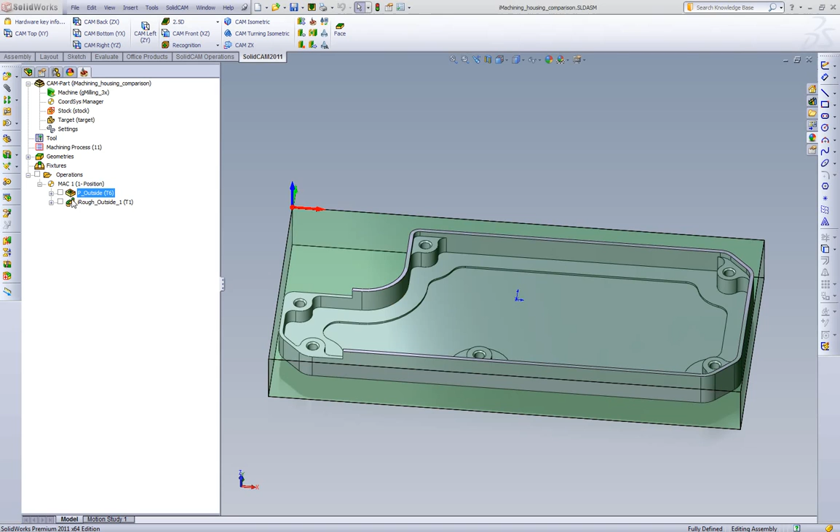In this video, we want to do a true and fair comparison of standard offset style strategies and the iMachining toolpath. And then we'll also compare the iMachining wizard and its feeds and speeds. What we have set up is we have a standard pocketing toolpath cutting the outside of our part. This is a standard parallel offset, as we can see, in one-way cutting. The second operation we have set up is an iMachining toolpath for that same geometry.

So let's go to the pocketing toolpath and let's pick some real-world feeds and speeds. What we have here is a 1/2" end mill, 4-flute. So let's say we'll start out with just a high-speed steel 4-flute roughing end mill, cutting steel. If we were to pick some real-world feeds and speeds, assuming we're not doing high-speed machining, if we were cutting steel, we'd probably run something around 100 surface feet and pick something around 4 thou chip load. This ends up working out to roughly 760 RPM and a little less than 12.5 inches a minute.

If we were using a roughing end mill, chances are we'd be able to do this cut in one depth of cut. It's 900 thousandths, and we'd most likely get away with it. So we'll compare the cycle times for this feed and speed at one depth of cut, and then we'll also cut the depth of cut in half, do it in 2 passes, and see what the difference is. We are using a 60% step over on this part. So if we save and calculate and go to our simulation, we can see our feed rates and our running time, and we'll just quickly play this toolpath. We end up with 13 minutes and 30 seconds, roughly 13.5 minutes.

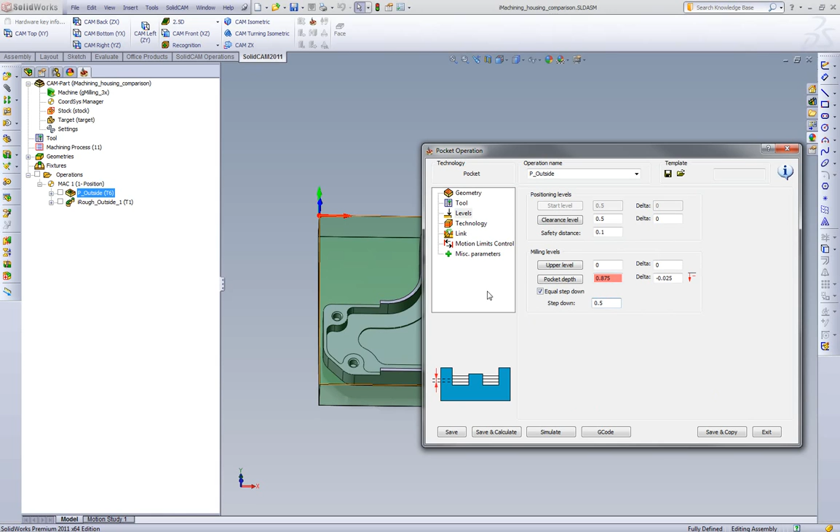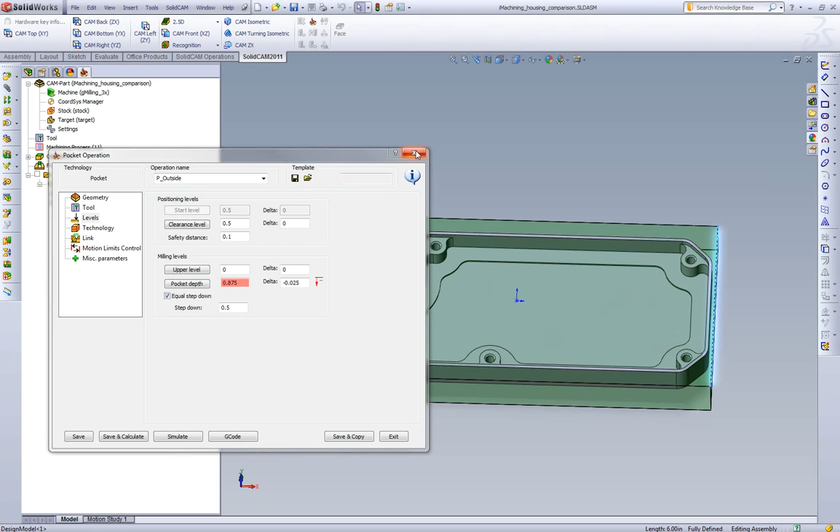If we were to change this cut and use, let's say, equal step down and a half, which will give us 2, and play this, we end up with almost 25 minutes worth of cycle time to machine this outside steel part. To give you an idea of the size of the part, it is roughly 12.5 inches by 6 inches long. Now let's take a look at if we use those exact same feeds and speeds, the 763 RPM and the 12.5 inches a minute, with an iMachining toolpath, what are we going to get?

Now most high-speed machining toolpaths on the market today will tell you that their strategies need to be using high-speed feeds and speeds to be more beneficial than the standard style strategies. In iMachining, we don't believe that. So we're going to disable the wizard entirely and run our own feeds and speeds: an RPM of 763 and a feed rate of 12.5 inches. Going to go to our technology. We're going to do one depth of cut. Since we're using a roughing end mill, we're going to maximize the step over, which at 80 degrees is 200 thousandths roughly. And since we're trying to mimic what we get in parallel strategies, we're going to pick a bigger minimum cutting angle.

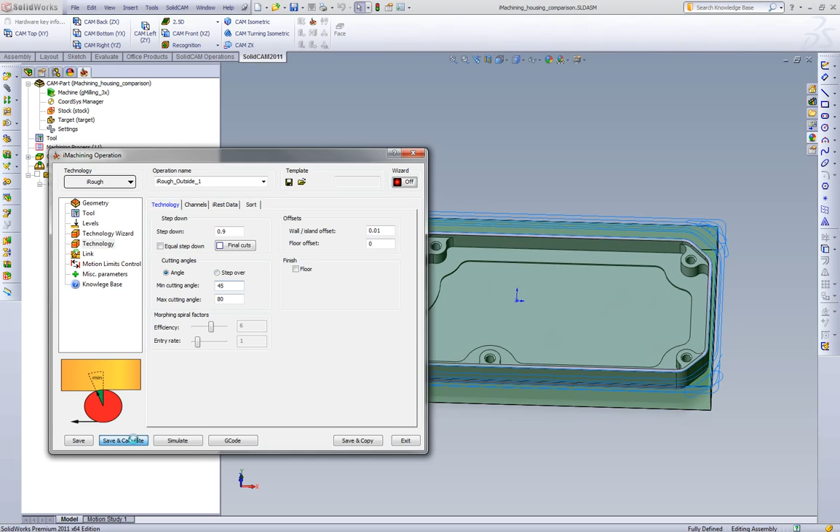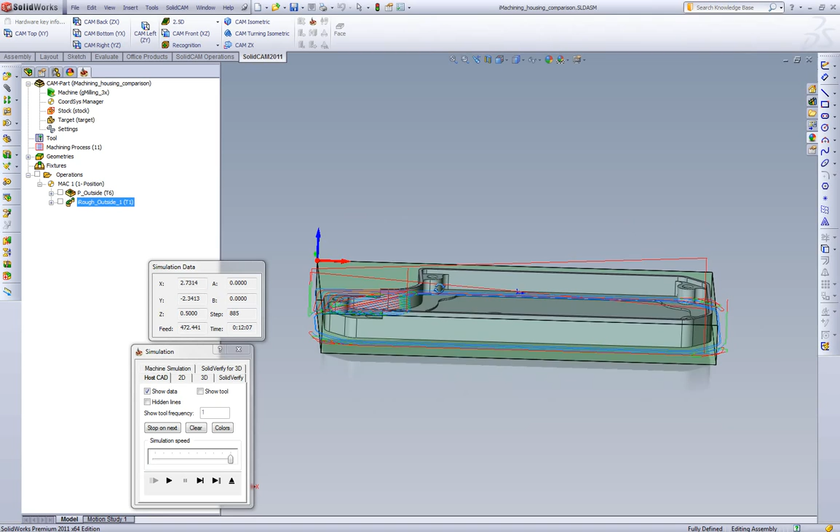We'll calculate this toolpath, run to our simulation, and see what we get. The iMachining toolpath is 12 minutes and 7 seconds, roughly 1.5 minutes quicker than even the standard pocketing or offset strategy with the same step over, feed, and speed. Now, how does iMachining do this? It does this by a couple things. First, as we look at the toolpath, there's very little clearance and retract movements. Because iMachining is doing smart repositioning and always staying in the cut, we're not wasting any feed Z moves or clearance moves. So you're getting a very big optimization just by keeping the tool down inside the cut the entire time.

The second thing is, we know we're not always going to achieve the step over that we ask from the toolpath. When that happens, we're automatically adjusting the feed rates to handle that. So if we start single stepping this, we can see in the beginning as it's entering the cut, we have less step over, so our feed rate's actually a little bit higher, and it gets up to 17. As we hit the full depth of cut, we're right at our roughly 12.5 inches per minute. So iMachining is being intelligent.

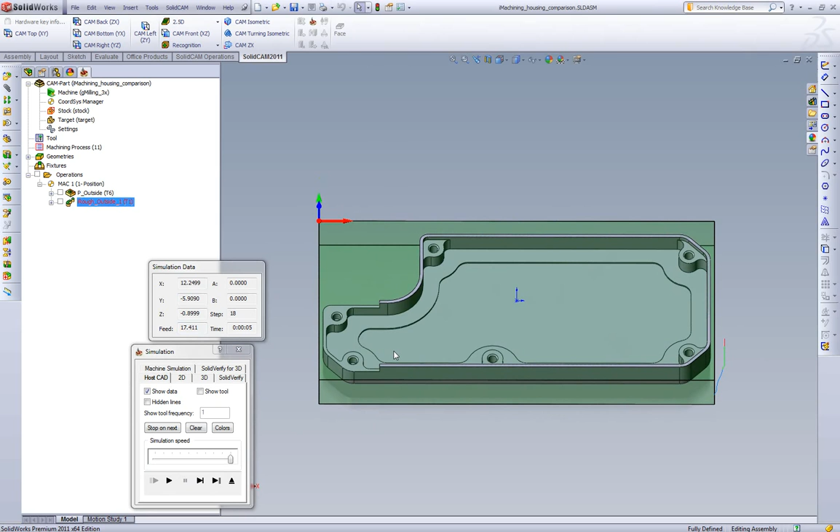It's getting rid of the repositions. It's staying in the cut the entire time. And it's adjusting the feed rate when the step over or the width of cut is falling below what we specify. So very efficient feeds and speeds, and you get a very nice toolpath. This is also going to be better for the tool in the long term because the tool's also staying in the cut more. It's not entering and exiting as much as it would with standard pocketing or standard offset cutting.

So this is a comparison of 13 minutes, 13 and a half, to 12 minutes. Not a huge difference, but even using the same feeds and speeds that any shop is used to, we're going to see a benefit with iMachining.

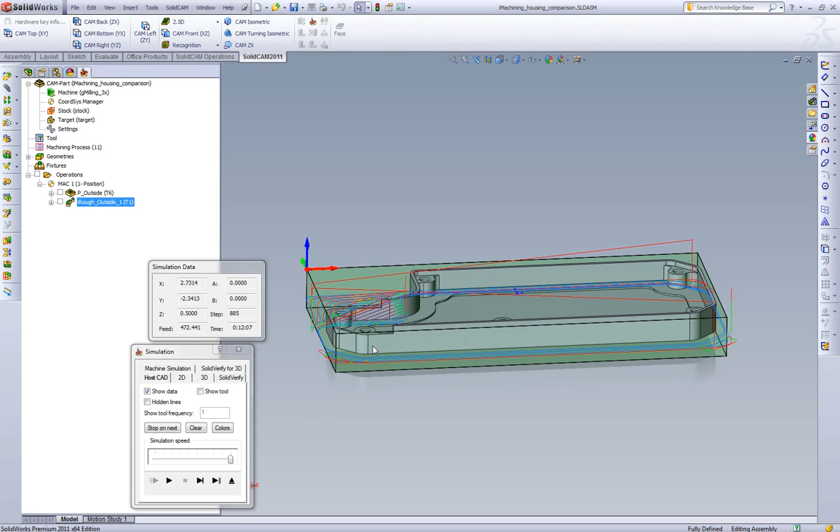And not to mention, when the tool path is running out on the machine, as an operator, you're going to feel much more comfortable not having all of those Z clearance retracts and plunging all the time with your hand on the cycle start button when you're running the first piece. So iMachining also gives you a better feel at the machine because the tool path is staying down and it's cutting more intelligently.

Now let's also take a comparison of what happens if we were to try and do, let's say, high-speed machining with a carbide end mill. Our customers are using high-speed or using carbide end mills today. So let's say we went back to this pocketing end mill. We're still going to use a 1/2 inch. We're going to still pretend it's a 4-flute carbide end mill. Now we're going to switch things up a little bit.

Now most likely if we're running carbide end mills in steel, we're going to run more surface footage, and we're also going to run shallower depth of cuts because we're not going to take the full 900 thou at that step over. So let's say we want to run something like 2500 RPM. A 1/2 inch end mill at 2500 RPM works out to 330 surface feet, which is a little on the high side for steel, but for people doing high-speed machining in steel, really not that high. Definitely doable. And then if we look at our feed rate, we get roughly 40 inches a minute. So 2500 RPM, 40 inches a minute.

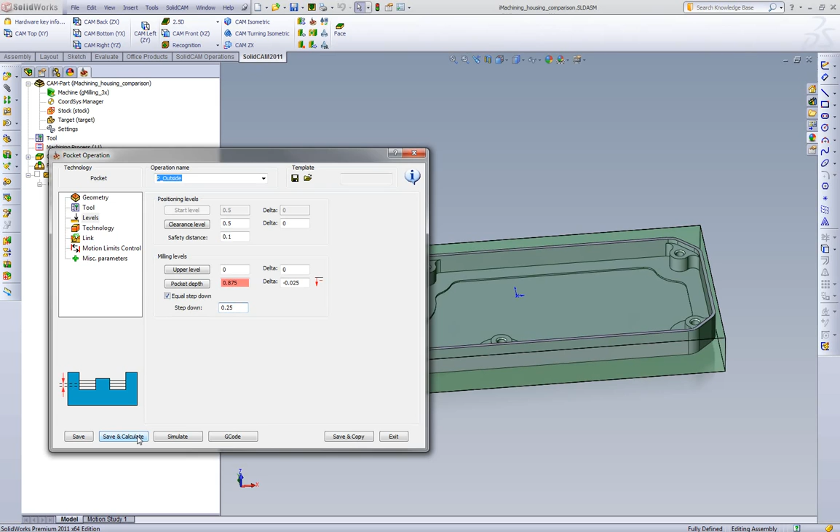We'll go to our levels, and we'll pick a 1/4 inch depth of cut. I personally feel that's a little heavy with a 4-flute 1/2 inch carbide end mill, but it really depends on your machine, the rigidity, the holder. So a 1/4 inch depth of cut is not unreasonable. Maybe it's a little high for some machines, and other machines might even be able to go a little bit deeper for sure. So let's calculate this tool path, and we'll see what cycle time we get.

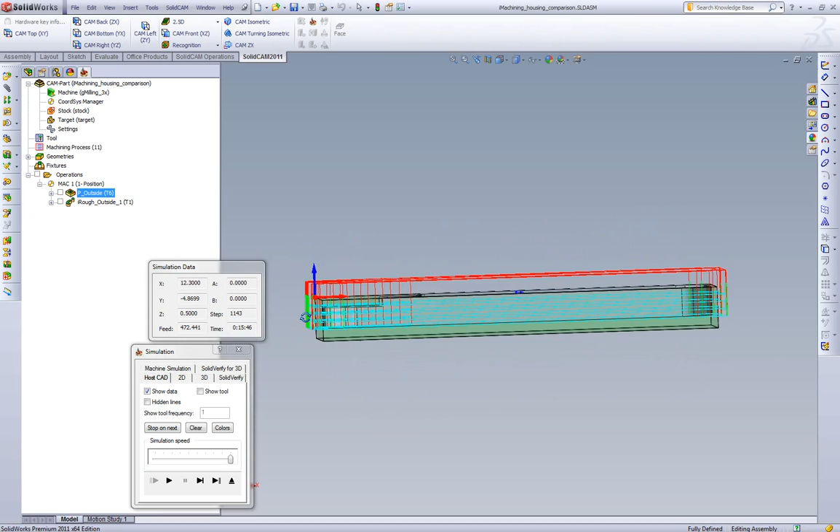So if we see here, we're sitting at 15 and a half minutes, almost 16 minutes. So this is a cycle time at a 1/4 inch depth of cut at 2500 RPM and 40 inches a minute. We can see basically the same tool path we had the first time. Now we're just going with a little bit shallower depth of cut, more RPM, higher feed rate.

Now let's go to the iMachining tool path, and we'll do the same thing. So we'll go to tool. We were running 2500 RPM. We're running 40 inches a minute. We'll also mimic the same step down, so we'll pick a 1/4 inch, equal step down, and we'll calculate the tool path.

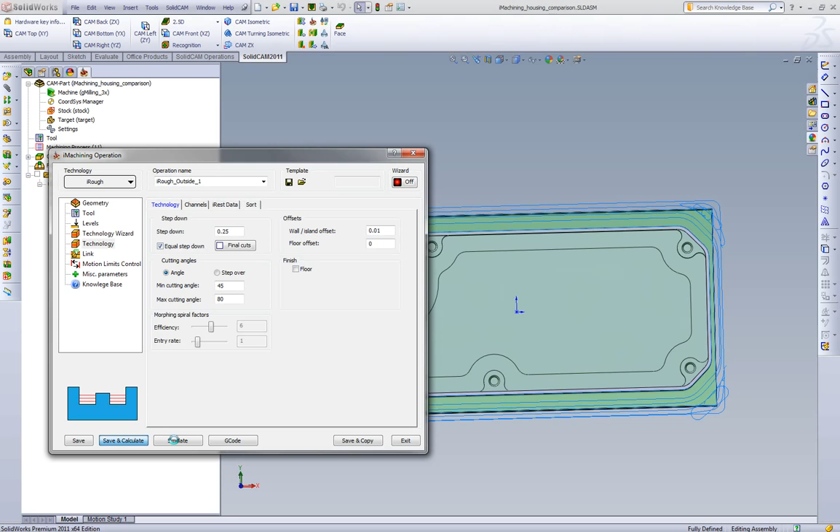15 minutes and 53 seconds. So basically you got the exact same cycle time going between standard pocketing with high-speed machining and iMachining. Yet we're keeping the tool in the material the entire time. You're getting less wear from the tool entering and exiting, and it's also doing smart repositioning.

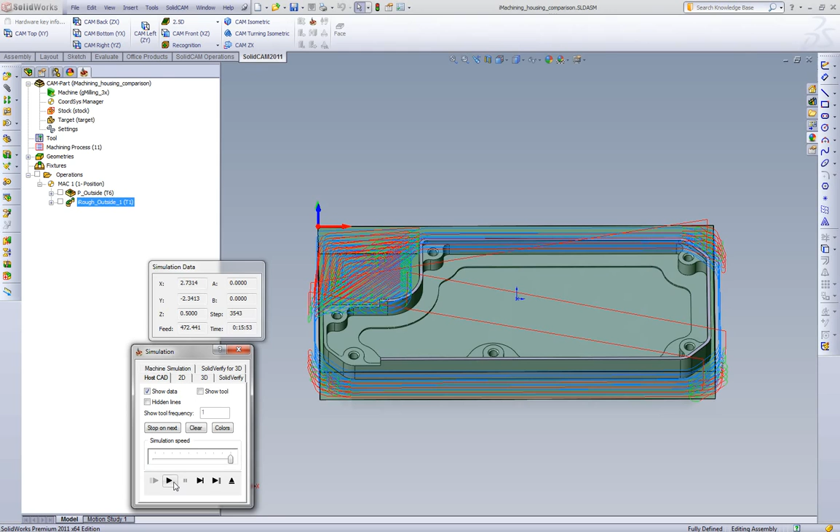Now let's do some comparisons on what iMachining's wizard would tell us to run. Because now that we're actually doing a step over control toolpath, we can take this thing in one depth of cut. Not a problem at all. So we're going to turn the wizard on and take a look at what the wizard generates. So first, let's not go all the way up to level 8. Let's say we're trying to be a little conservative, and let's step down to level 3. Now, when we step down to level 3, a couple things we're going to notice here. iMachining, unlike what we were doing with standard pocketing, is going to do a smaller radial width of cut.

This is because now we're doing full depth of cut, so we want to shorten up the width of cut, so that way we're not getting into a heat condition. When we're also doing this, we're going to adjust the feed rate for chip thinning, so we're running a constant chip thickness. Now, if we look, iMachining does some different things than what we do in standard pocketing.

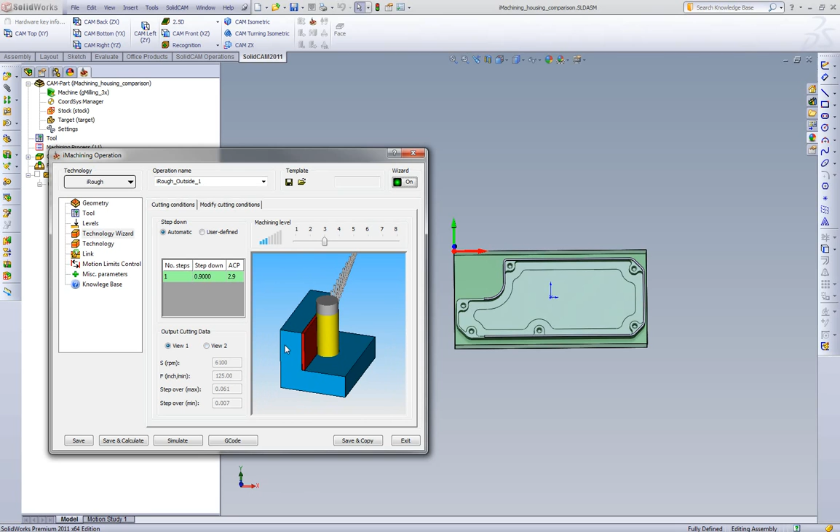When we're using carbide end mills, we're going to try and hold 2 thou and 9/10 of a chip thickness. So what this means is at the 61 thou step over, the 125 inches is going to meet that 2 9/10 chip load. Now iMachining is going to run up to 6100 RPM. This is going to be no problem with iMachining at all.

The biggest reason, as we know with standard offset style strategies: when does the tool make the most heat? When it goes into the corners. We've all seen as the tool path runs into the corner, you can see it smoke up. We've all basically had the coolant just dripping on it, and we know as it's cutting around the outside, it's nice and fine. As soon as it goes into a corner, the tool starts to smoke and the coolant evaporates, because the heat generated in the corner is what's dictating the entire tool path for us.

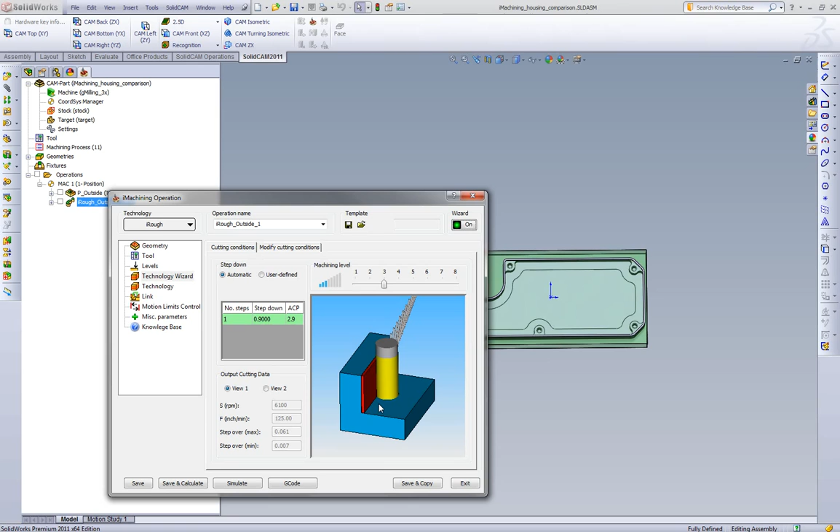Even though we knew if we were running in a straight line, we could run 6,000 RPM in steel, that wouldn't be an issue. Not at this step over, not at that depth of cut. But the issue is, in standard pocketing and standard offset style strategies, we're getting too big a step over in the corner, chip thickness is going through the roof, and we're slowing down the entire tool path because of it. So if we looked at what iMachining would do for this strategy at this step over, we'll see what time we get.

Now what we're going to see is, one, you're going to see a lot smaller step over, but we can see what happens. We go all the way down to 4 minutes of cycle time with iMachining. That's still a very, very conservative feed rate and RPM with iMachining. We do have to remember, this is much higher than the 2,500 RPM we were running in standard pocketing, but we're limited in standard pocketing and offset strategies because of the corners.

Now, even if we were to take iMachining down to, let's say, level 1, which would get us down to roughly that 2,500 RPM range, a little less. And as we say, level 1 is here to be very safe. This works really good when you have a part that's maybe hanging out in there and you really don't have a lot of cutting force, or your tool is hanging out very far.

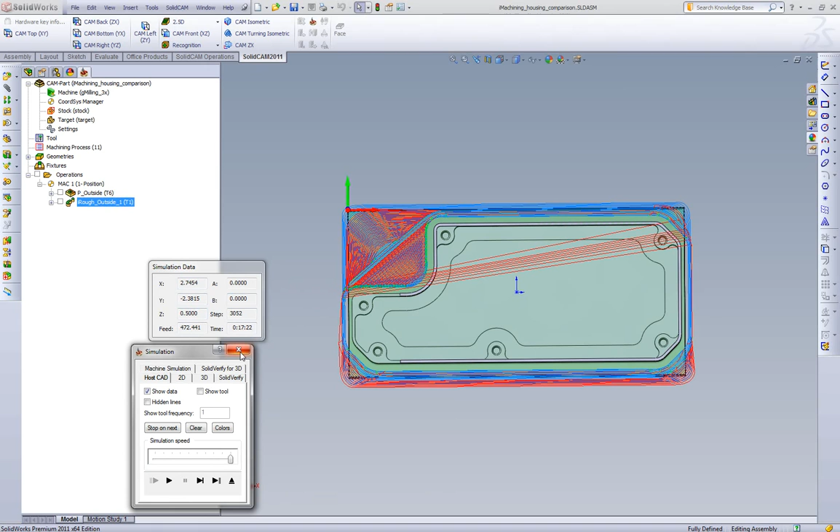Now even if we do this, we see we get the 17 minutes. So that is 2 minutes more than what the standard rough cut did with the standard offsetting. Yet we're actually still running a little less RPM and feed rate than we were in the pocketing, because this is only 2,200 RPM as opposed to 2,500.

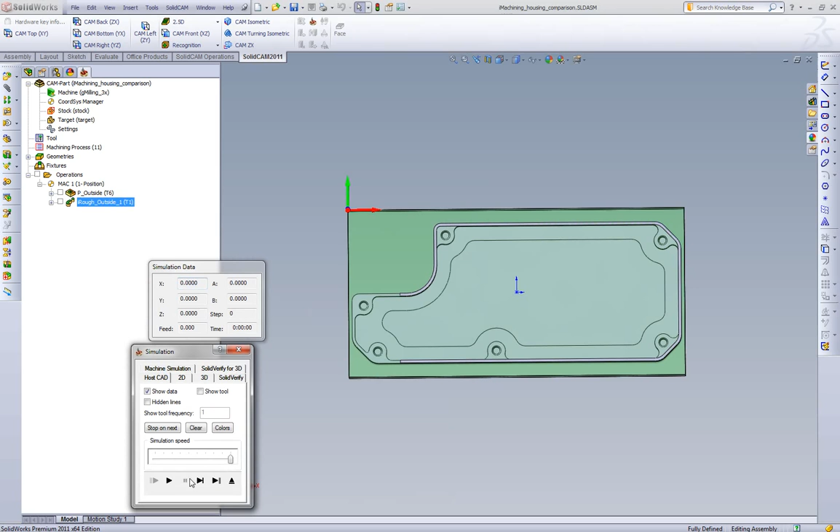So you can really see that with iMachining, we're giving you a lot of choices here with the feed rates, and the user doesn't have to worry about all that synchronization. What chip load am I running? What's my feed rate for that step over? So iMachining is taking care of all that. And if we were to calculate level 2 and just see our feed rate there, we go down to 6 minutes.

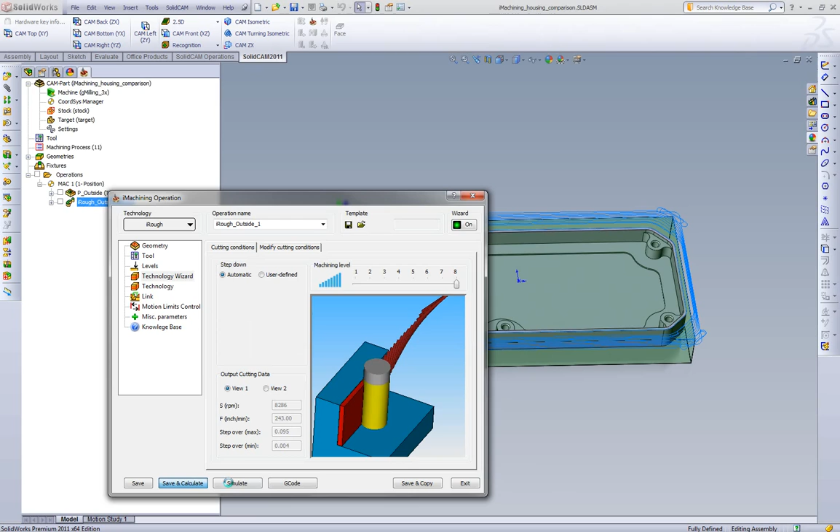You can run the same feeds and speeds that you run normally, and you'll still get better tool life, more efficient cutting, and better on the tool and the machine. With SolidCAM's iMachining Wizard, even level 1, 2, or 3 is going to beat the cycle time of what most customers are doing with machining today. And it's very easy, as we see going up to level 6, 7, or 8, to achieve those feed rates, because iMachining is managing all of this stuff.